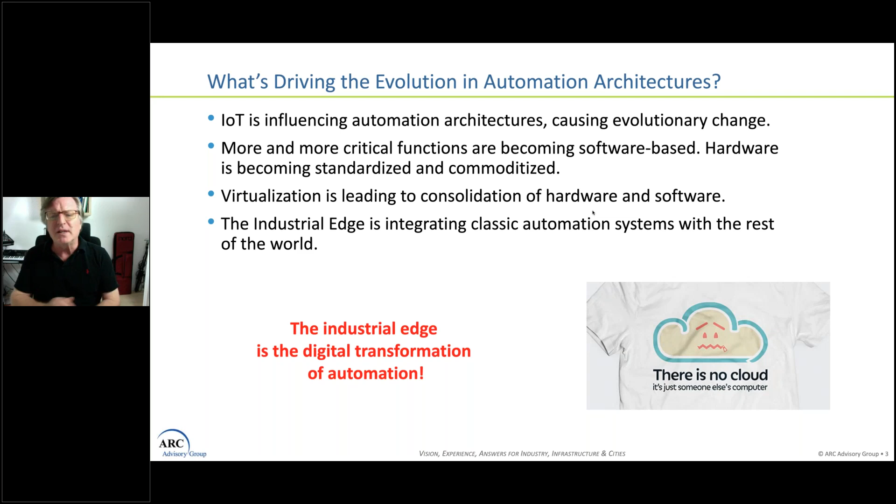ARC has a long definition of what the industrial edge really means. We've been developing and modifying it for over 3 years now. I don't like the definition because it gets too technical. The edge is really just the space where IT meets OT.

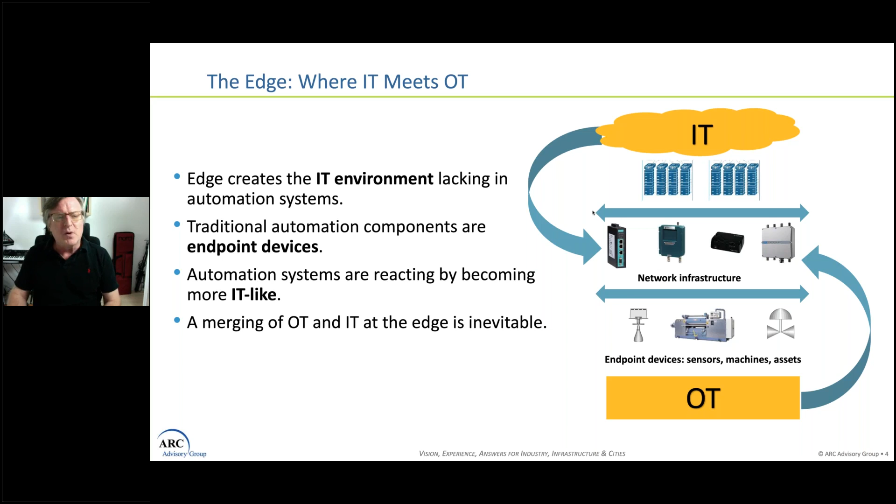Let's take a look at the way we've laid out our machinery lines in the past and how we automated them. This is an example of a classic automation architecture from about 25 years ago. What you see is a bunch of machinery connected. Each machine is delivered with its own PLC and its own operator panel.

The integration of the machinery is done after the machinery arrives at the end user site, and an integrator or the end user himself might go in and connect the PLCs, share some data. That PC you see at the far left is what you might call a line PC. It might be running an application to maintain a database collecting data from the PLCs, maybe managing recipes and sharing them over the network with the PLCs.

The network itself is a network from 1995. By the color, I'm guessing it's probably Profibus. It's not Ethernet, it's not very fast, and it's not really efficient for a large network.

You also see some additional PCs connected along the line. Those would be PCs delivered by the machine builder with the equipment, adding additional functionality that does things the PLC can't do. They might maintain a local database, provide visualization, or do quality control right on the machinery—again, equipment delivered directly with the equipment.

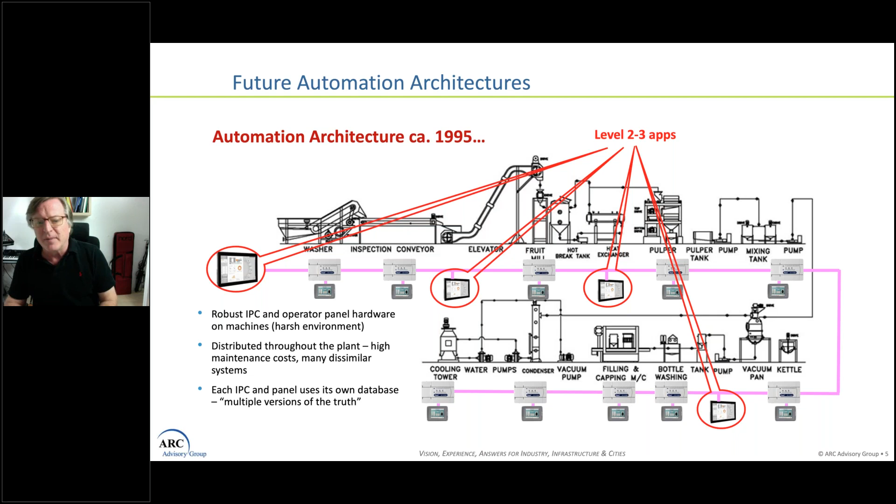So back in the present day, we have our Ethernet cable. What if we took a bold step and took all that plant software—this is what I call level 2 and level 3 applications, which could be visualization, production management software, quality control, or specialty functions like measurement technology—and consolidated it all on that device on the left-hand side?

Nothing says we couldn't have an outside host company actually host that software at a different location. It doesn't matter where—we have networks that are fast enough, we have internet that's fast enough, and we have reliability in our communications that would allow that software to run elsewhere, and it might run better. Maybe we could put the software in the hands of people who understand software, not the machine operators, not the plant managers, not the plant engineers, but people who really understand IT and know what to do with software like that. This is just a scenario for the future.

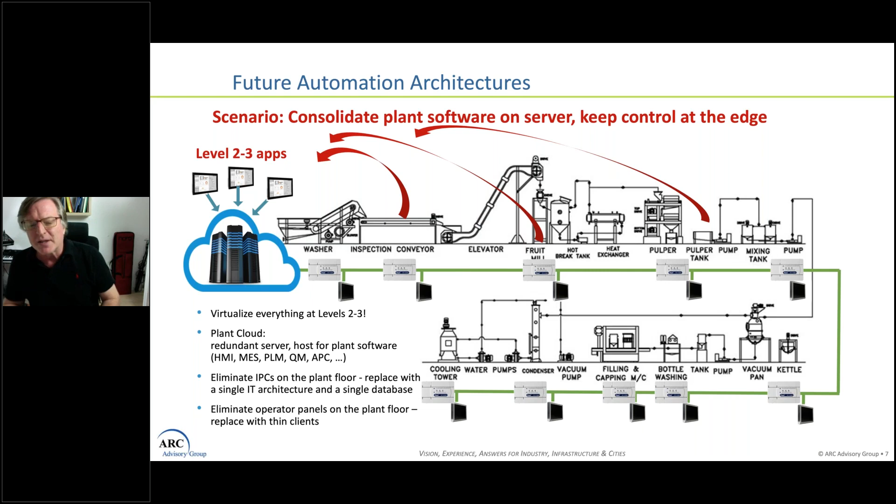Now, this is almost heresy, but what if I went one step further and watched the PLCs, the little gray boxes on the green cable? What if we took those off the machinery and off the line and consolidated them on the server as well? I've talked about this concept for a few years. I've actually had some companies request that I don't talk about it in detail because it's going a little too far, but there are companies doing this today. If we have a good network, we don't need so many pieces of hardware out there on the machine running software. We can even consolidate the control software on a server, put it in a safer environment for execution, and put it in the hands of people who understand the needs of that software and what has to be done.

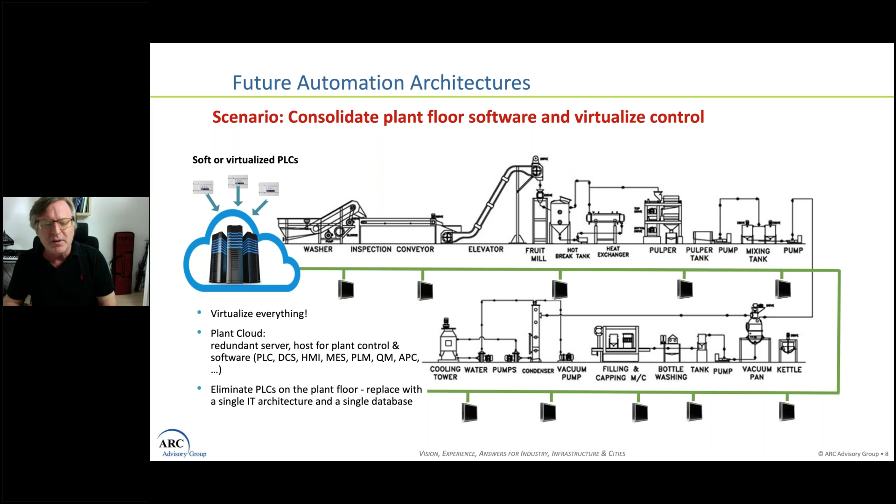So if I go even one step further—this isn't a big step—what if we modernize the network? The green cable is the green cable; as an example, it might be Ethernet IP, it might be Profinet, but those are all what we call open proprietary networks. They're definitely not standard, and they all have one of the larger suppliers in the background pulling the strings. What if we moved our network to truly standard Ethernet? We can do that today. We can solve some of the speed problems just by using faster Ethernet—Gigabit Ethernet is becoming more popular in factories.

We also have things like TSN. TSN is a timing mechanism that's just recently in the process of being implemented as part of standard Ethernet, which means it's available for everybody, and it'll be the only thing you need for timing on Ethernet to achieve determinism. That's useful in applications like motion control, where you need very fast coordinated timing when you have several, dozens, or even hundreds of axes that are coordinated.

The second thing I mentioned is OPC UA. I'm not going to talk long about it, but OPC is the OPC Foundation, and UA is the Unified Architecture. This is many things, but it contains, among others, a set of standardized protocols that could, in the future, possibly replace the protocols used by PLCs from their manufacturers. It's a movement that's going on—it might take some time, but in the future we could stop worrying about the network problem by just using one network, like the IT people have been doing since the early 1980s. We tend to focus a little too much on this color of cable and that color of cable. Wouldn't it be great if we just had one standard network?

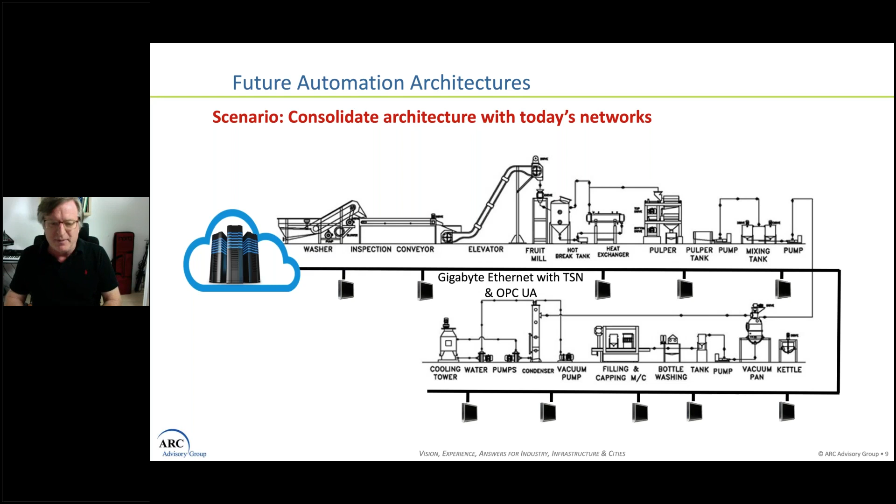Talking about networks, all that wiring, what if we took another evolution step and did this? What if we got rid of the cable and replaced it with 5G? We just completed some research at ARC on 5G as used in industry. In this application, this is a plant with a limited size, a known size, a length and a width of the building and a height.

Very soon, probably by 2022, you'll be able to install a private network in your plant using 5G technology, using incredibly fast speeds, much faster than we've ever been used to with wireless, with 4G, for example, which is sometimes used in the factory, but not very much, and certainly faster and more suited to the purpose than any form of wireless, even the new Wi-Fi 6 standard that's coming out.

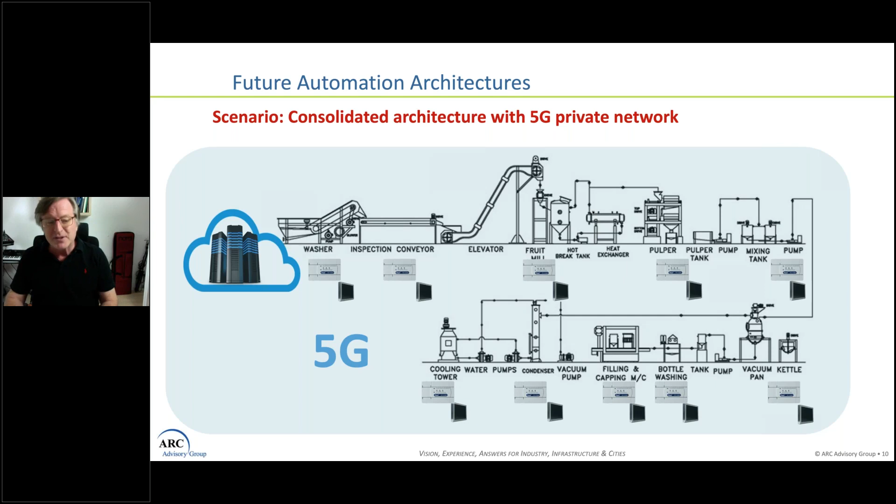5G is going to be a game changer, and it's going to provide that final boost of connectivity that will really drive our industry into the 21st century of the industrial Internet of Things. With 5G technology, all devices can be connected without a network cable, with more than adequate speed, more than adequate bandwidth, and with the reliability that we need for industrial applications as well. That's coming soon, and that's going to obviously change the environment.

So I like to call this sort of architecture an IT-like automation architecture, because it uses those concepts that I talked about, from modern standardized networking, software management, consolidation of software on hardware that's well backed up and made redundant 1 or 2 times over.

The benefits, well, just 3 that I mentioned here are, first and foremost, lower capital costs. If I use commercial technology, it tends to be lower priced. It's better known. You have a whole workforce with the skill sets to maintain it. It's much more efficient than using any sort of proprietary technology like we're used to in industry right now.

Because it's better known, you have lower maintenance costs as well. So after you've acquired it and installed it, your total cost of ownership is going to go down, because your maintenance cost over time will be probably substantially lower. And for the cybersecurity freaks, I threw this in, it's a lot easier using modern standardized tools to implement cybersecurity.

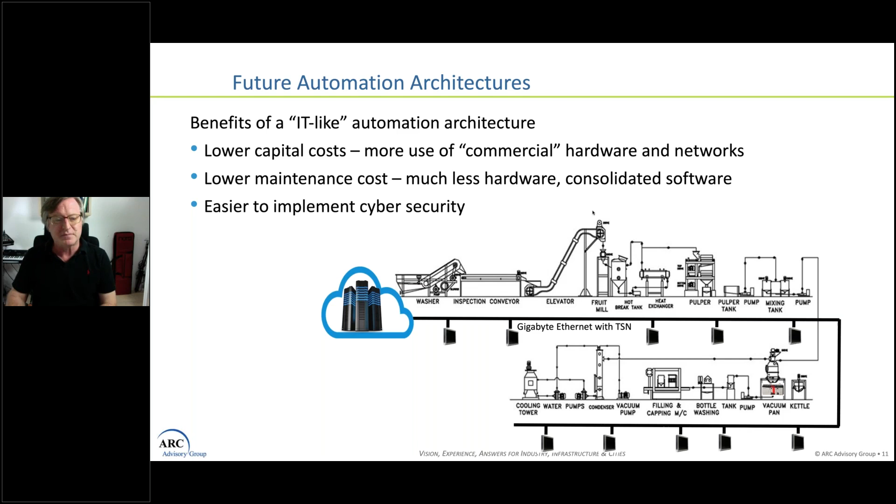I mentioned one application. I was a bit surprised. For years, I've been talking about this as if it were future music. And then at the ARC forum that actually took place physically this year, in the beginning of February, it must have been one of the last events in the world that took place physically, where people came together before the onset of the coronavirus.

But this one presentation was given by Dr. Henning Loeser from Audi here in Germany, a car maker. And he talked about how Audi is standardizing on these units, for lack of a better word. He said basically they're moving from what they do now, which is if they need a certain function on the factory floor, then they buy a box.

The box contains all of these devices. Obviously, there's a PLC in there. There's some edge infrastructure devices. He's got a firewall here. He's got actually 2 PCs doing something in there, and they're then talking to some sort of process device, which looks like a robot. In the future, he wants to move from buying a box to buying a piece of software.

In other words, somebody will provide the box and that'll be standardized. There won't be a PLC in it. There won't be all these individual boxes. There will be one PC-like piece of equipment, or he's got two here maybe, and all of the functionality will run in software on these boxes.

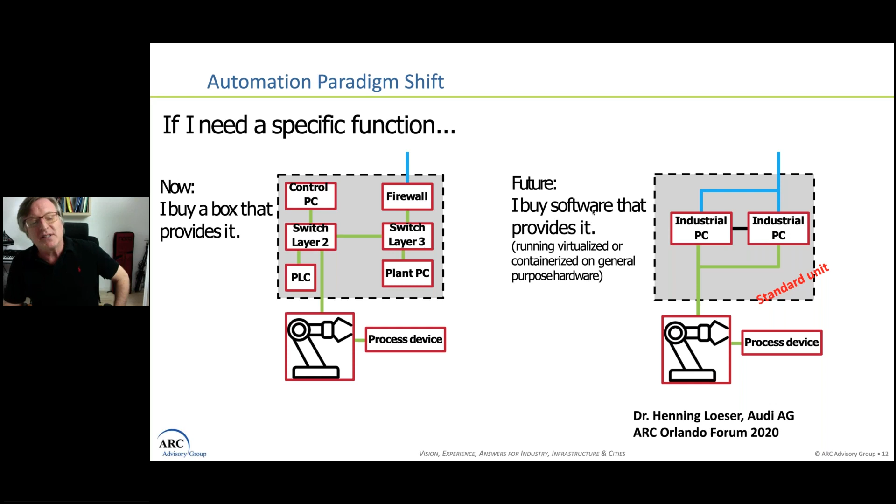Okay, I'm going to do a pivot in the remaining minutes I have, and I want to talk about modular production. In particular, there is this concept that we call modular type package that is growing in popularity, especially in the process industries. But going back...

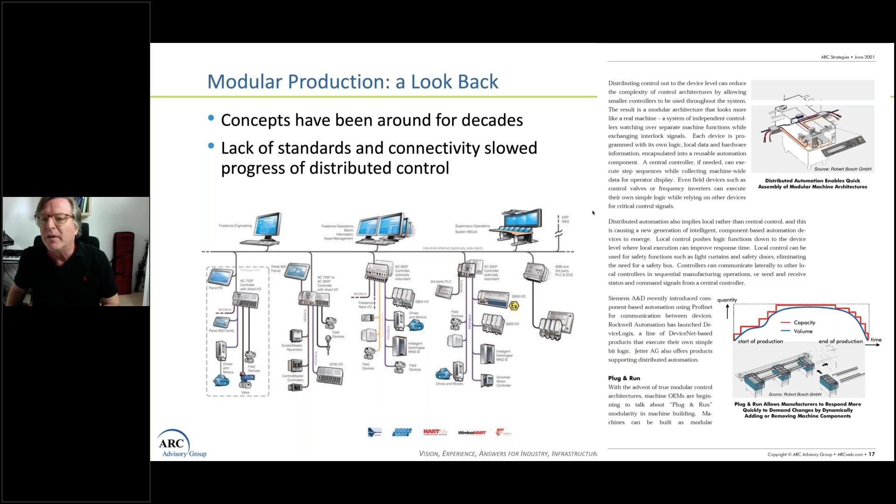I think I'll point out the date. I wrote this report in 2001. That's how old I am. And I discussed concepts of modularity and how PLCs can support that.

19 years later, we haven't really come a long way because there haven't been good standards. What we've had is the typical network architecture you see on the left-hand side, consisting of a steep hierarchy from top to bottom, and a bunch of different networks - that's all the different cables you see in different colors.

This type of architecture actually hindered the development of true distributed controller automation and slowed the progress towards modular production.

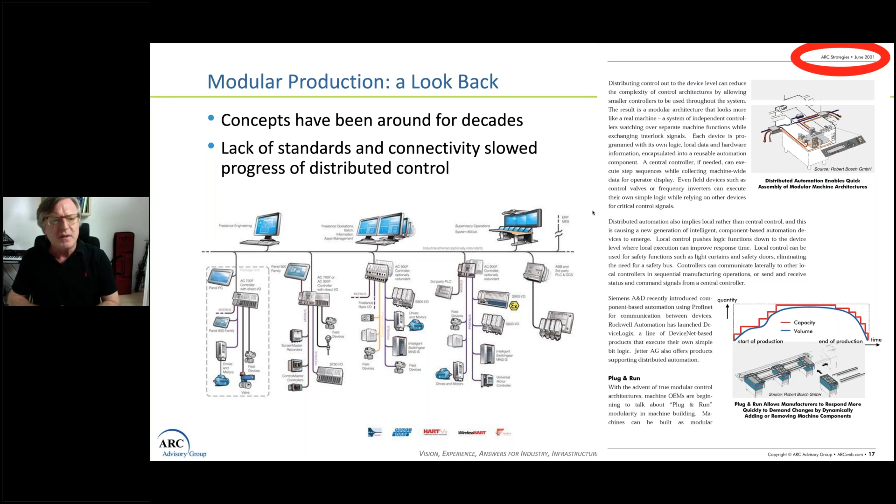The traditional approach, though - let's take an example of chemical production. It works pretty well here. The typical approach to designing a plant to produce a chemical is to build a pilot plant on a small scale and figure out the process, get all of the process parameters right. I mentioned a couple here: heating, mixing, reaction, cooling times, things like that.

Once you have the pilot plant running, which is almost like a laboratory, then you scale up - you multiply everything times 100. You re-engineer it to produce that same product on a large scale, and it's probably more than factor 100, it might be factor 1,000 or 10,000. You can't just simply multiply by a single factor. You have to re-engineer everything, but you make everything larger, so it affects the design of equipment and the size, and affects all the parameters.

This is the way we do it - this is the classic way to build a chemical plant today. The risk, obviously, is of overinvestment and overcapacity. Most plants operate in a range of between 60 and 120% of what we call nameplate capacity. And that means if demand shifts outside of this range, then the plant is likely to be still operating, but not in a very good way economically.

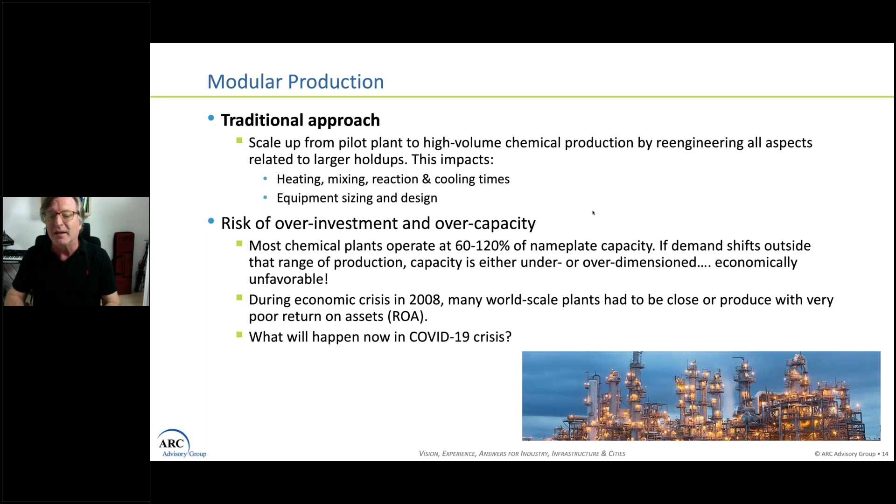So my question now is, we're in the middle of the COVID crisis right now. So what will happen today? Probably the same thing - probably some plants will be, or already have been, shuttered, or they're operating but not at the capacity they need to actually make money for the owner operator.

So the quick definition, or the quick explanation, of the MTP standard, or the concept of MTP, is to not scale up like I talked about. In fact, I like this saying here - you number up instead of scaling up. And what does that mean?

Well, instead of building big pieces of equipment that are built to a fixed capacity, you build much smaller units. You standardize those units, and then you build your capacity by taking those units like Lego blocks and putting them next to each other to build up your capacity. This is the idea of numbering up rather than scaling up, because it gives you flexibility that you don't get by designing and building a full-scale plant.

It allows you to achieve certain economies of scale by using multiples of the same equipment and parts, and it can significantly reduce upfront costs and capital expenditure. What it does primarily, though, is give you the flexibility to adjust to changes in demand for your product.

So like I mentioned, in the downturn of 2008, or what we have right now, some of the modular production units can be taken offline to reduce capacity, or they could even be packed up and moved to other locations where they're maybe more needed. When demand rises, you could do the opposite and rebuild your capacity. It's an excellent concept - it's not that easy to implement. That's why it's taken so long, but we're working on it.

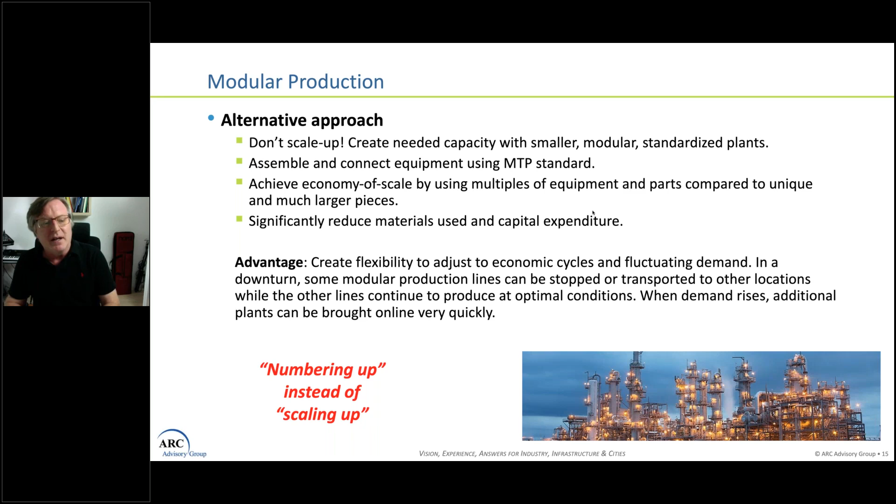I want to give an example. Here in Germany, there's a chemical company, Evonik, and Evonik has recognized that this is going to be a big thing for the process industry. So they've gotten actively involved with some of the suppliers, including Phoenix Contact and ThingWorx, that's from PTC, that software.

Just last year, the company applied this MTP concept to a plant in Singapore for the first time. And now this year, they've been working on installations of pilot plants in Germany.

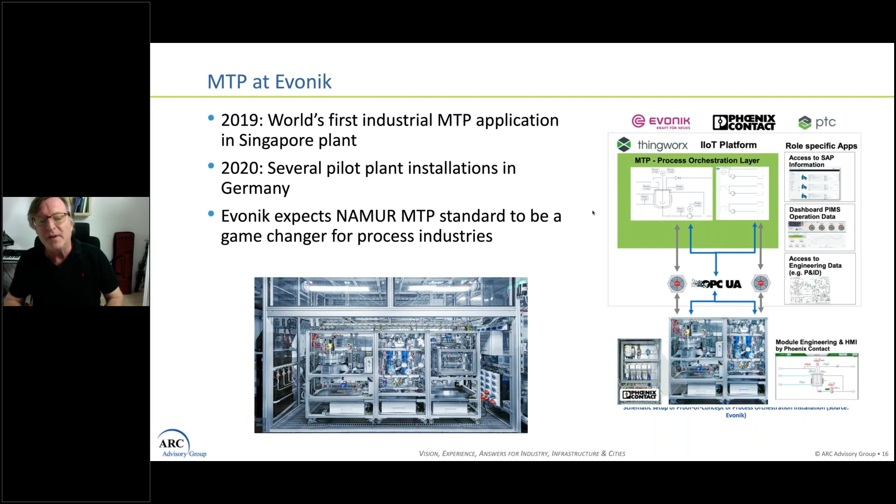So what is modular type package exactly? Well, it's a response to the rigidness of full-scale plants with no flexibility for capacity, and the need for flexibility for that capacity. In general, we feel investments will have higher returns because equipment is used better, used more often, used more efficiently. The average lifespan of each unit will probably be higher because they're reusable. They don't have to be junked when the plant is closed. The nice thing is that this reusability supports the circular economy.

For short-lived specialty chemicals, for example, you can produce smaller quantities. In the interest of time, I'm going to skip over a couple of these things because I just have one or two more minutes to go.

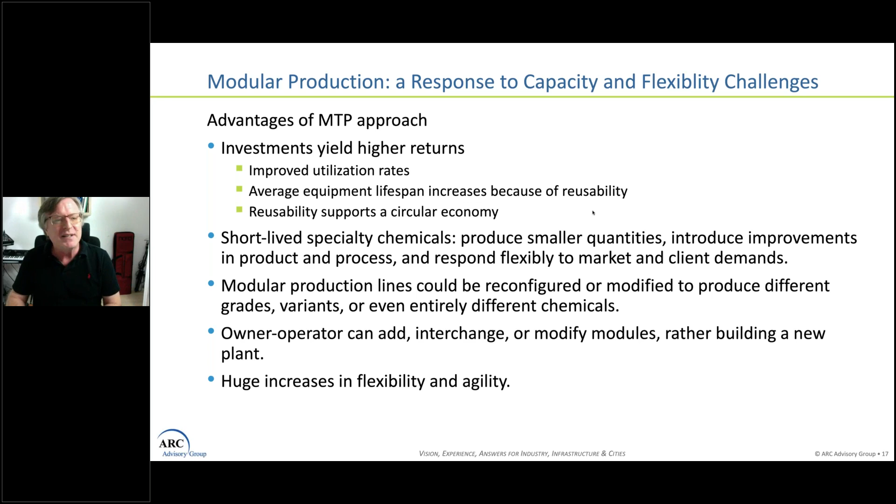Let's take a look at what it takes. I think this is more important to emphasize. It takes a new mentality, it takes new approaches to engineering, and it takes standardization. I mentioned Namur is an organization of chemical companies, of end users, that is currently working on standardizing MTP.

Rather than optimizing the process to achieve a capacity range, the plant uses standard, existing, and reusable modules to achieve the increases in capacity, as I talked about. I put together some examples - I'm not a process engineer myself. Feed preparation, PAT is an interesting thing I've actually researched in the past, separators, reactors, heat exchangers, or an assembly of pumps and valves with the measurement and controls built right onto the same skid.

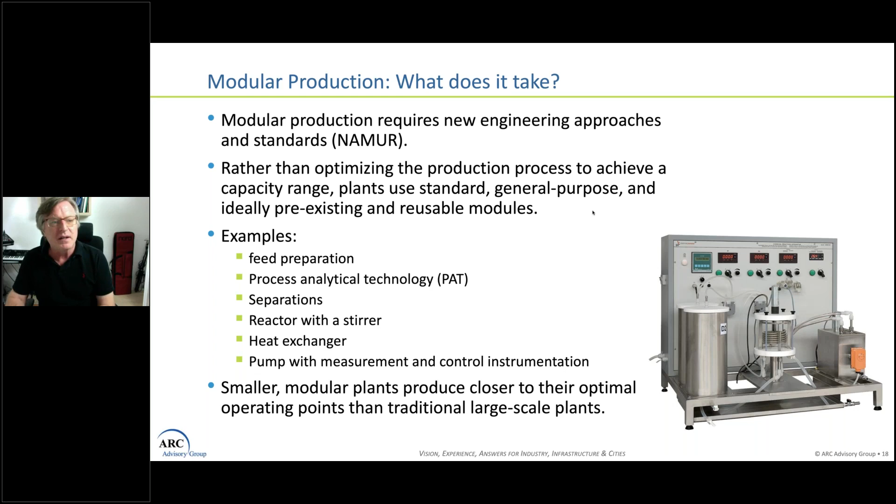Challenges are that, as I mentioned with the Evonik project, it's currently limited to small scale stuff - laboratory and pilot plants. As far as I know, no industrial scale modular plant has been built around MTP yet, but it's coming. The CapEx costs I mentioned at the beginning are definitely there - they're possible, but there is some excess cost with modular units. You have additional piping, more instrumentation, probably more controllers out there because every unit has its own controller.

The question of how large it should be is still open to debate. It's not going to be 100% size, it's going to be smaller - is it 10% smaller? 20, 30, 50%? For this point, there's also not yet any clear business models for the different partners involved - for engineering firms, for equipment builders, and for the end users, the owner operators. Finally, owner operators need to realize economic returns at several levels, not just one - at the plant, at the business unit, or the corporate level.

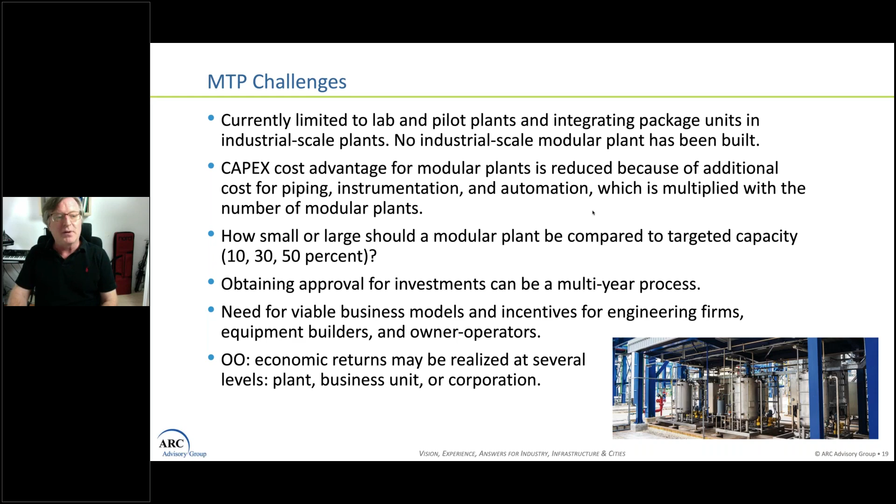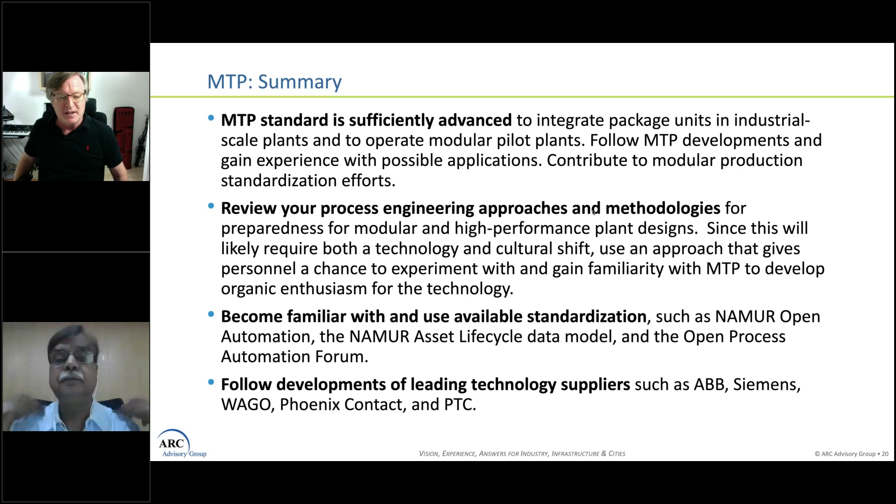What we hear from Evonik is that the standard is not finished, but it's sufficiently advanced that you can use it. It's important, if you're an end user considering this, to review your process engineering approaches and see if you have the tools, the mentality, and the willingness in your people to make this shift. Most important is to become familiar with the standards, and if you want, you can also become active and join these organizations and share your voice. Finally, I'd recommend following developments of companies like ABB, Siemens, WAGO, Phoenix Contact, and PTC - about five or so companies actually involved in practical applications of MTP.

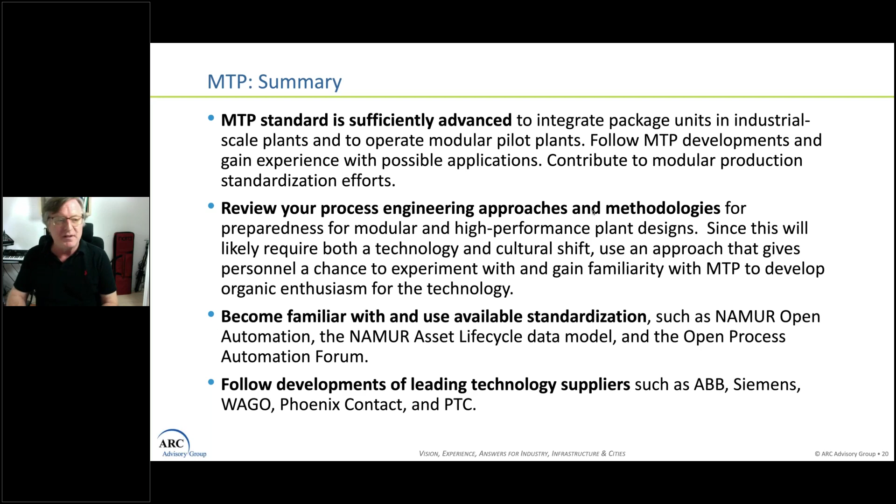To summarize very quickly, architectures are evolving, as I mentioned. I showed two models - are we consolidating or are we distributing? The reality will be that we'll probably have both. Virtualization will help consolidate things, but increased intelligence will lead to more distribution. Two different types of companies are going to compete for this space, the IT companies and the OT companies. I think OT companies are going to win because these are the guys with the domain expertise. I mentioned industrial 5G is going to accelerate this a lot, starting in about two years from now. And again, the standard for MTP is not finished, but it's advanced enough that we can get going on it.

And on that note, I want to end my presentation.